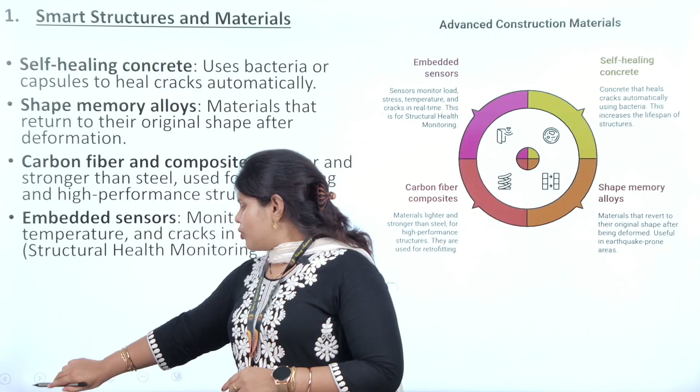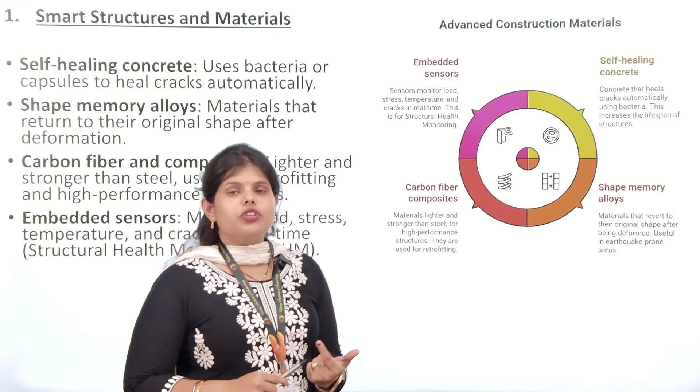Today in this class we will study about the future of structural engineering and the innovations added in it. When we go for the innovations, the first thing in our mind is smart technology or AI. So smart technology or addition of AI in construction field, and we will know what are the advantages of using smart technology and AI.

So first we will go for smart structures and materials. What are the smart structures and materials? First is self-healing concrete. What is that? Self-healing concrete is nothing but addition of some bacteria or capsules to heal cracks automatically. We know that after construction, for some period—maybe 10 years, maybe 5 years—we can see a crack. We can see some points where crack started, and by increasing the days, it will increase in length and width. So we use that kind of bacteria to heal automatically.

Next is shape memory alloys. What is that? Shape memory means when a structure deforms, it will regain its original shape and size automatically. How can we do that? By using a similar kind of bacteria.

Next is carbon fiber and composites. Instead of using steel, we can use carbon fiber, which is lighter and stronger than steel. So that is beneficial for high performance structures.

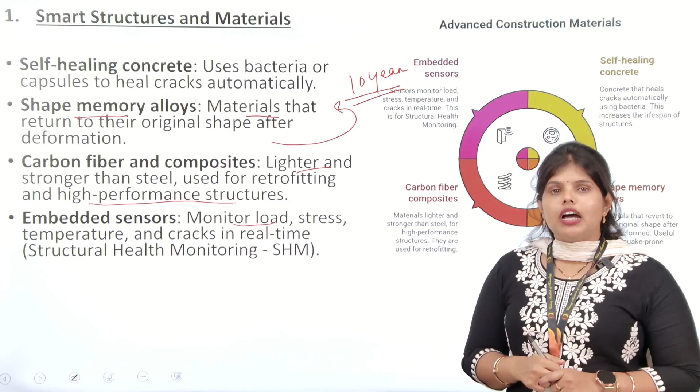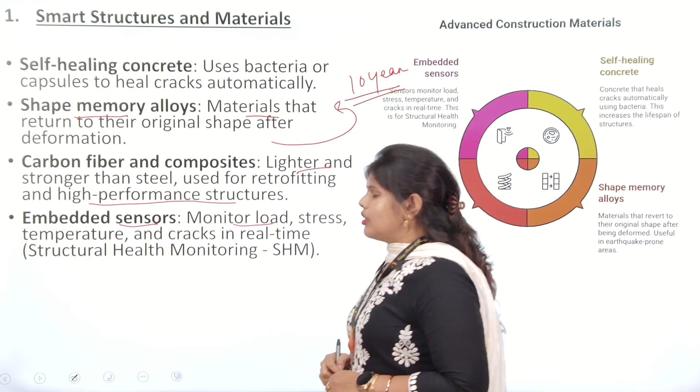Next is embedded sensors. Sensors can monitor load, stresses, temperature and cracks. If a crack is going to form, or there is a type of crack formed in future, that can be known by the sensor—that is structural health monitoring. So the first one is smart structures and materials.

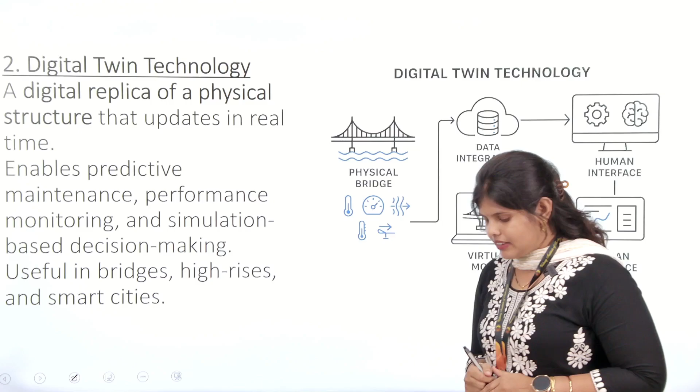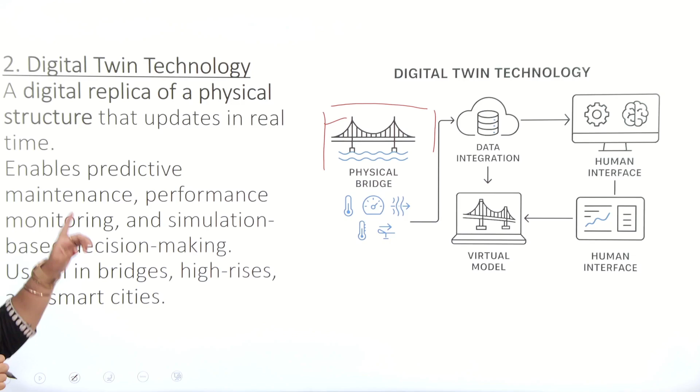Next is digital twin technology. What is that? I have taken a diagram of a bridge here. So here we have a physical bridge. When I say digital twin technology, we have a similar kind of digital, you can say robot, with the same property or same physical property as the structure. That can be a bridge, that can be a building, anything.

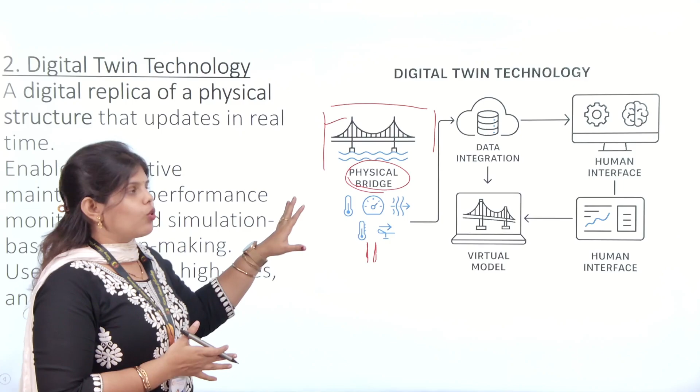So by that, when there is any crack formation, or if there is a change of loads or stress, we can take the data from the physical structure, and in the digital structure we can add or change the data and see whether any betterment occurs or there are any losses. We can see this in digital twin technology. That is a very good point.

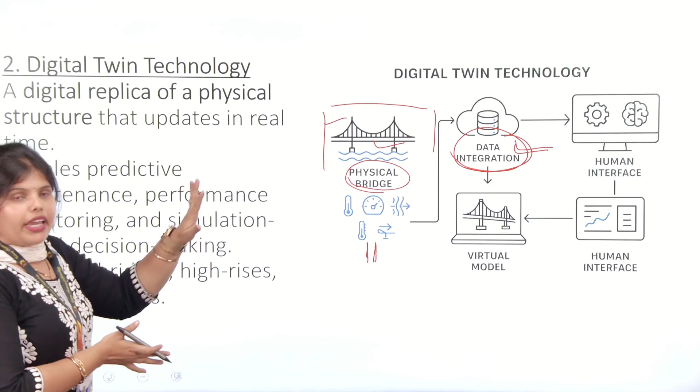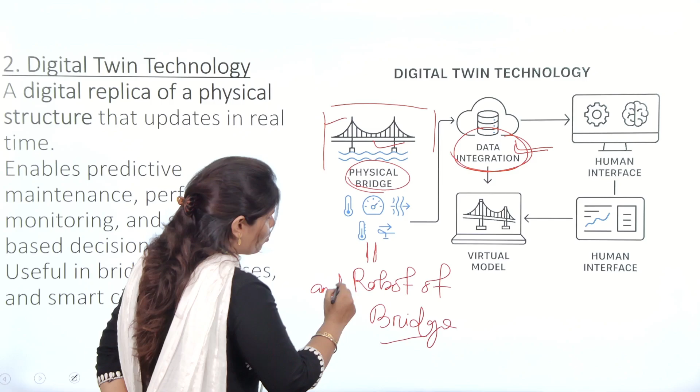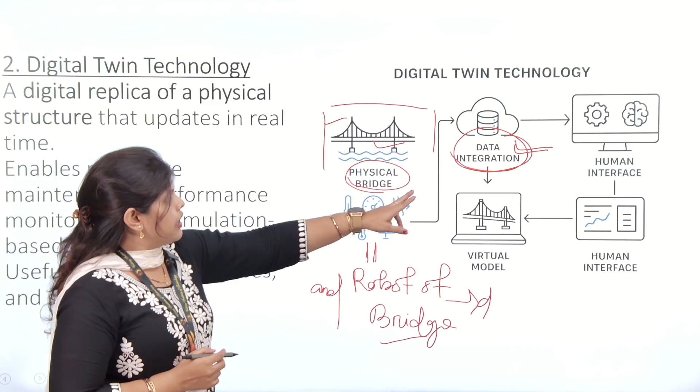Like we have a robot of what? A robot of a bridge—that is interesting. So what can we change? If we give some amount of load in the physical bridge, we will directly put that in the digital robot, and we can see whether it lasts for 15 years, whether it lasts for 10 years. We can see from the digital robot of the bridge, and we can build that kind of bridge ourselves.

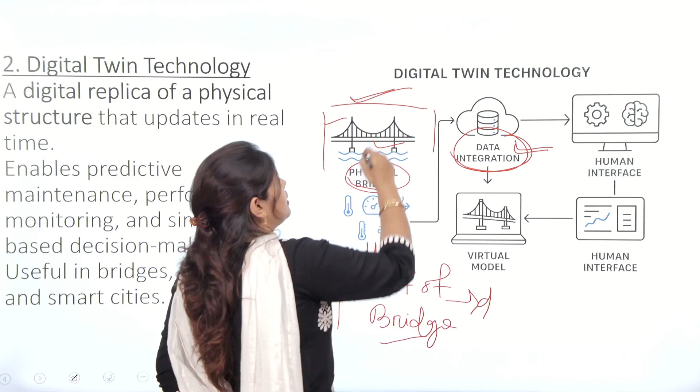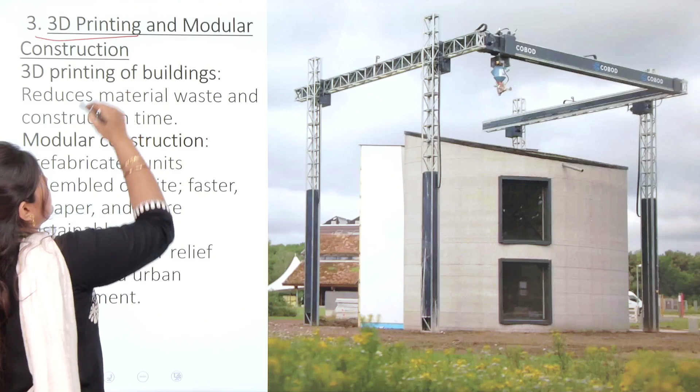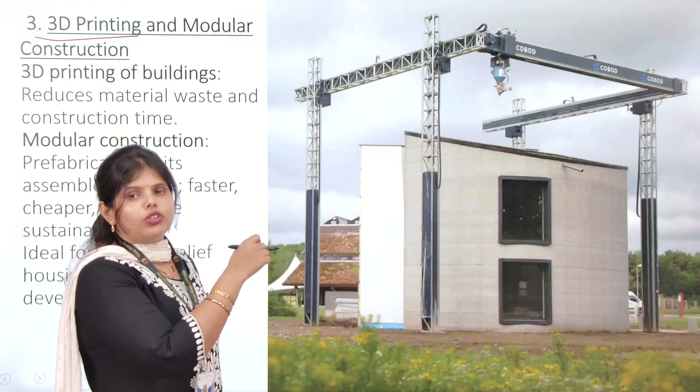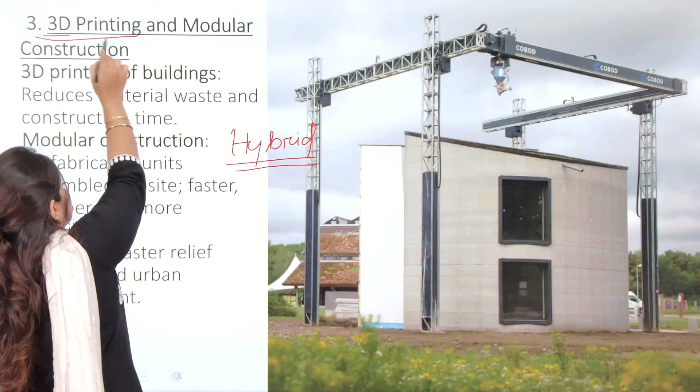These things are already implemented in Dubai at least. Next is 3D printing and modular construction. Nowadays you can see these kind of structures everywhere. We generally call them temporary structures, but this is called 3D printing and modular construction. 3D printing is one type and modular construction is another type. Some companies are mixing both these things and calling it hybrid. This 3D printing is generally used for wall and foundation.

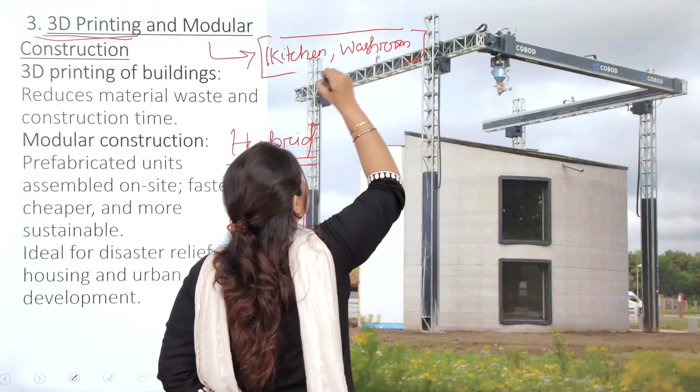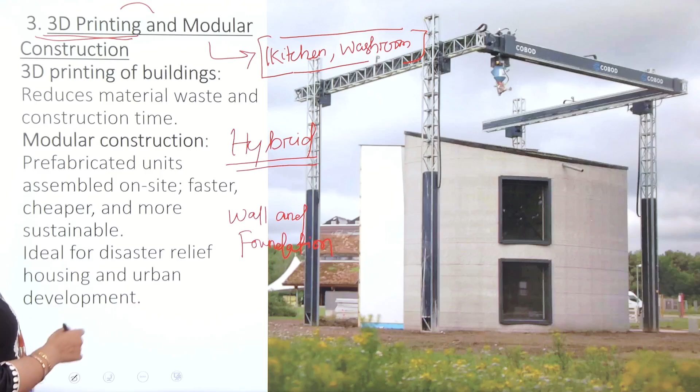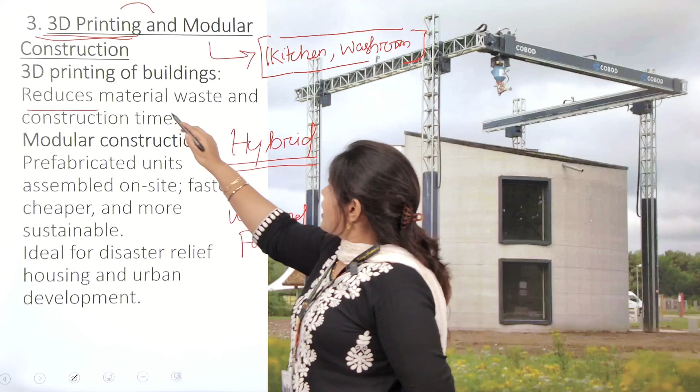Next is modular construction. Modular construction is generally for your kitchen, for small structures like kitchen, your washroom, etc. For small rooms or for interior parts, we can use the modular construction. Some companies are mixing both these things, 3D printing and modular construction, for making any office or small buildings. They do it for reducing the material or reducing the wastage. We can say concrete is the biggest amount of waste in this world.

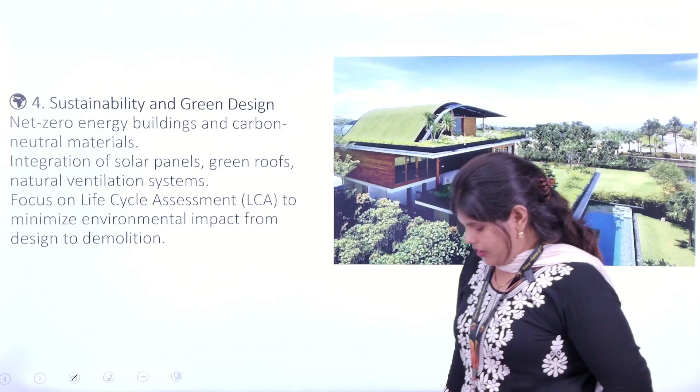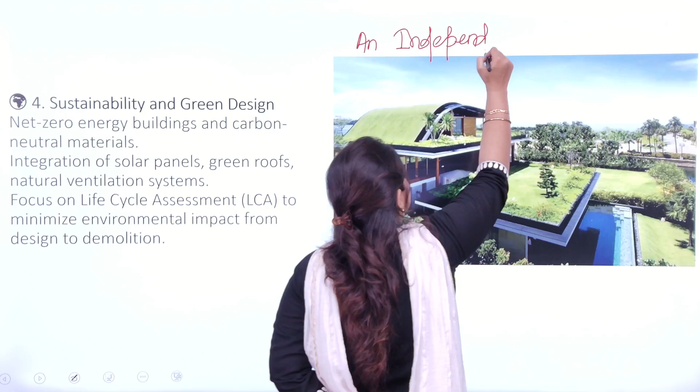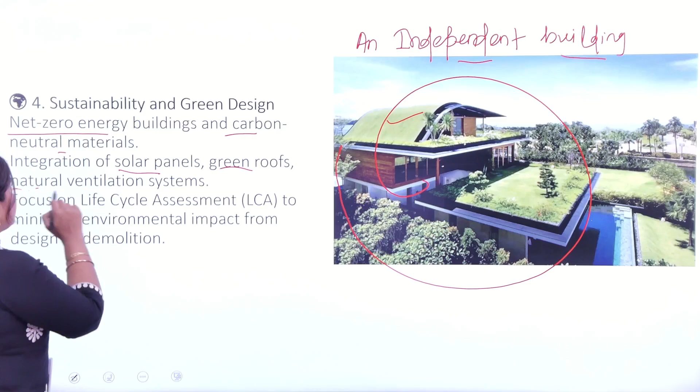Sustainability is itself an independent building, meaning the pollution of this whole building is covered by the greenery itself. By using green roofs or net zero energy building, you can say this is a carbon neutral building. By using green roof, solar panel and natural ventilation, we can say it is an independent, sustainable building itself.

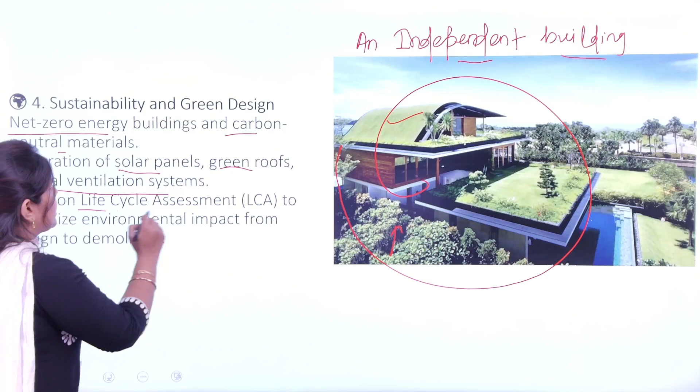This is also called life cycle assessment, to minimize environmental impact on the society.

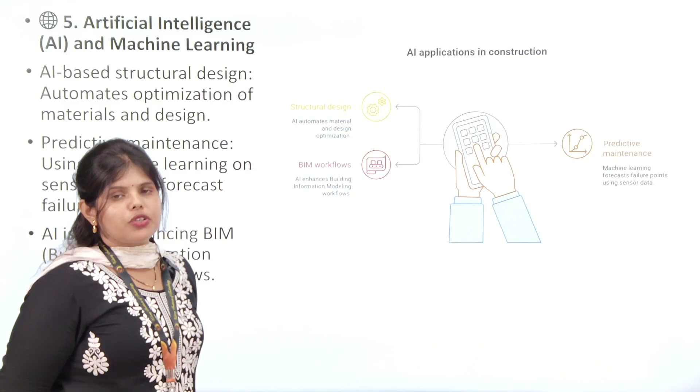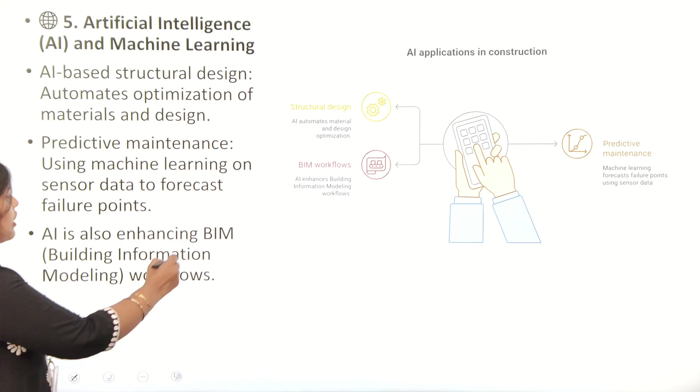Next is your artificial intelligence and machine learning. We know that AI is added everywhere now, so in case of building or construction field, AI is also implemented. AI in construction mainly means BIM, or building information modeling. BIM needs every small property of your building so it can detect how cracks are formed, calculate stresses and forces, and calculate everything by taking very small data from you.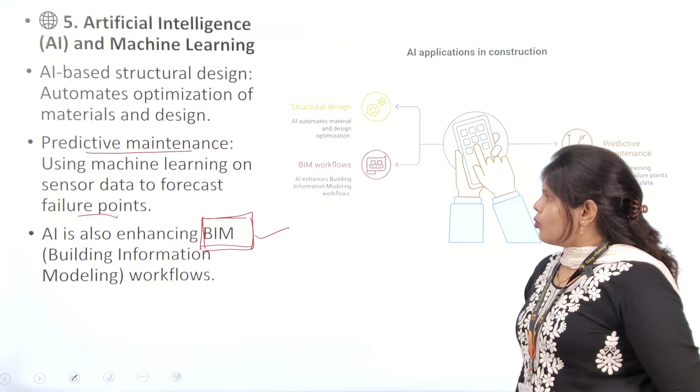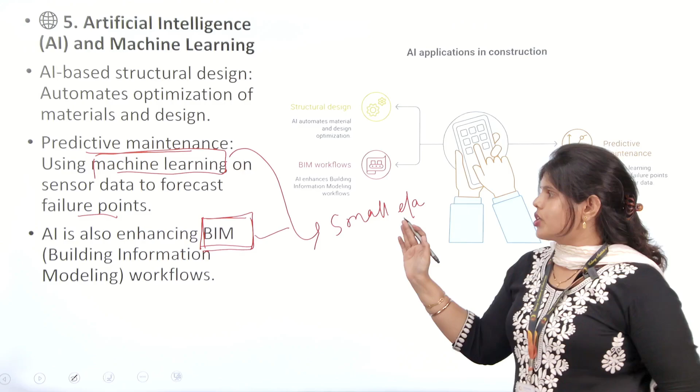Next is predictive maintenance, using machine learning on sensor data so we can forecast the failure points. Using machine learning, we give it very small data of the building when we construct it. Then by using sensors, it can tell us where the failure point is, and through predictions help ensure our construction or support will not fail. It also automates optimization of materials and designs.

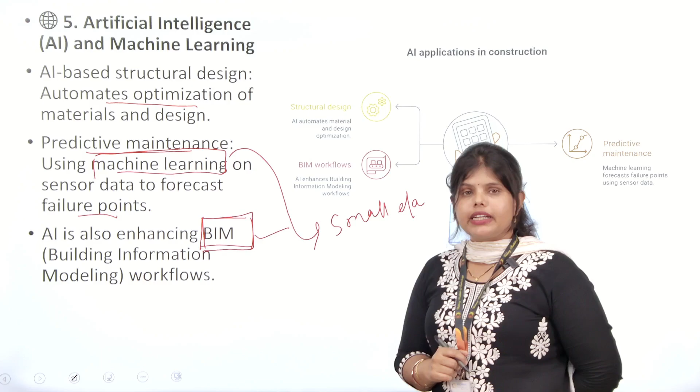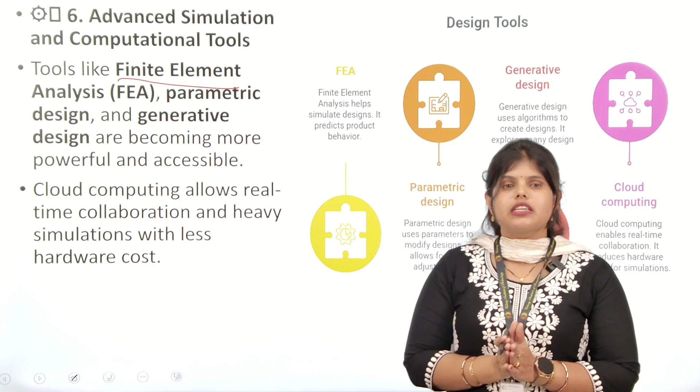Next we will go for advanced simulation and computation tools. These are nothing but finite element analysis. By using finite element analysis, parametric design, or generative design, it is very easy and accessible to compute all the data in case of a structure.

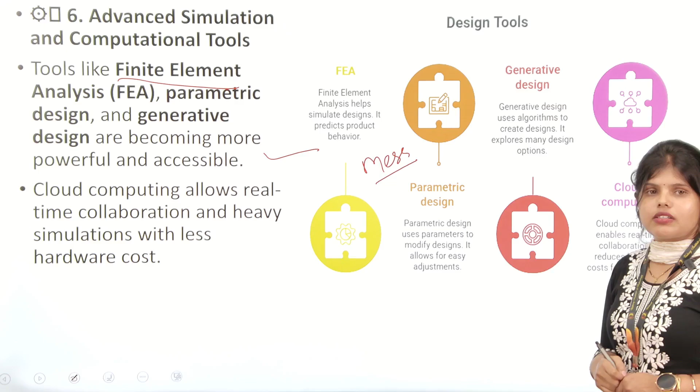By creating a mesh, finite element analysis takes the data of any structure from you and calculates or shows whether settlement occurs, where the failure occurs. Finite element analysis is very useful, using software like Plaxis and ANSYS for the finite element analysis.

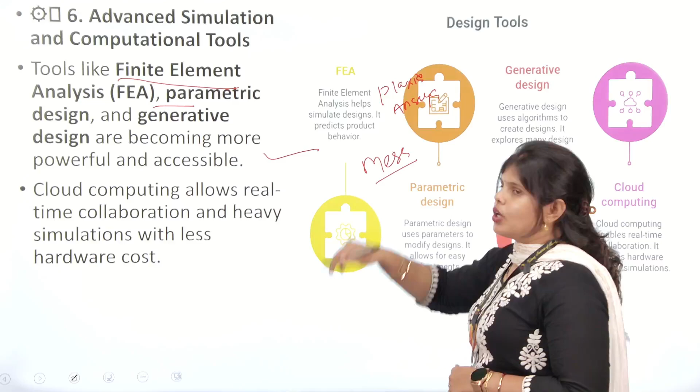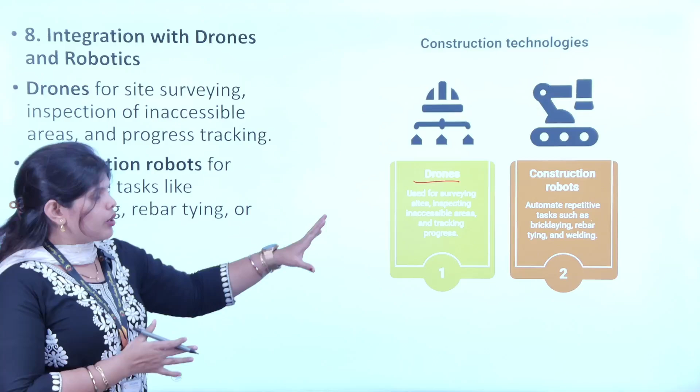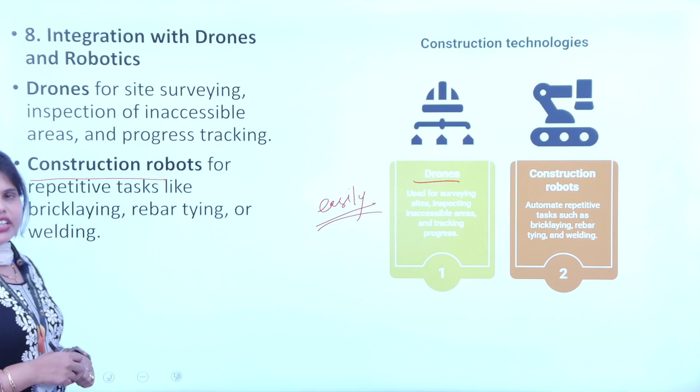Next is drones and robots. We know that before every construction, we need to survey the place. To survey the place, first we can use a drone, because it takes very small time and can survey the location easily and accessibly. Next is construction robots, which we can use for bricklaying, rebar tying. Generally in India, construction robots are not used yet, but we can use them.

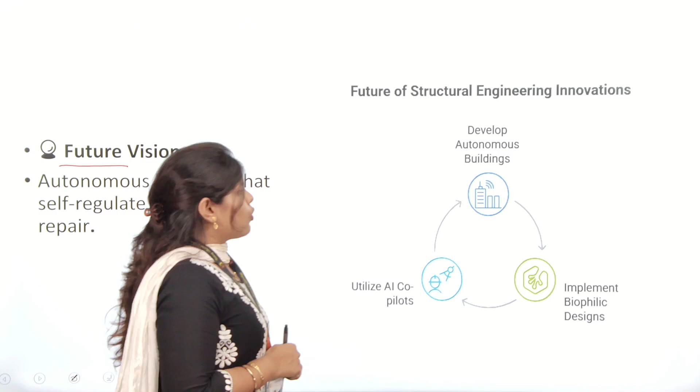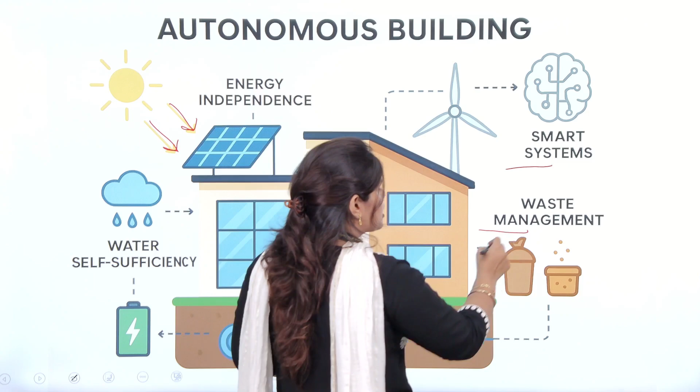So what is the future vision? Autonomous buildings, which we can imagine for self-regulation and self-repair. What does an autonomous building look like? Here is an example of an autonomous building, like from solar panels, independently taking energy by using smart systems, waste management systems, everything is here.

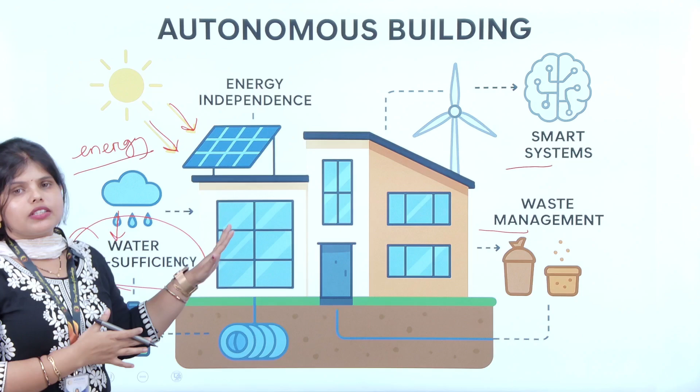From rain, by using a battery, we can self-sufficiently take the water and create energy. So when a building is autonomous, there will be no need for outside energy; it can create its own energy. So these are the future scope for construction things and structures. Thank you so much.